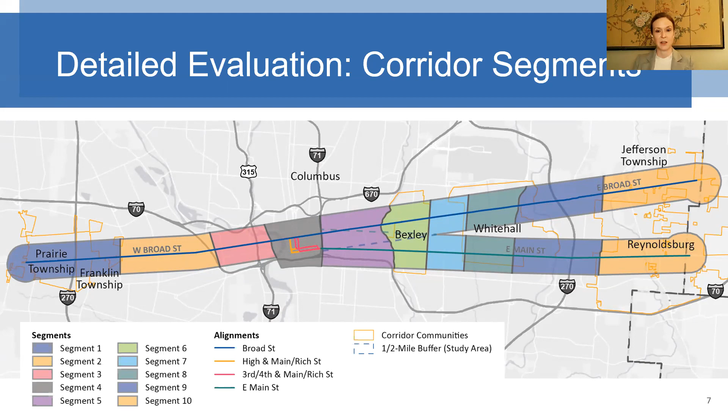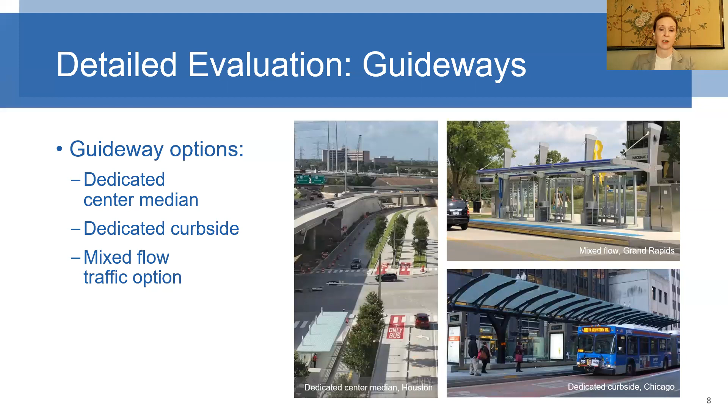The detailed evaluation we've organized into 6 different buckets, and we've organized those results by segment. All the folks presenting today are going to present the results of these different evaluation buckets. Then we'll show you a decision-making tool where you can make different guideway decisions for each of the segments along the corridor, picking either main or broad on the east side. It'll auto-populate things like capital costs, O&M costs, ridership, and a lot of the key metrics necessary in making decisions.

What it doesn't do is capture every single consideration that we should be thinking about as we go through this process of designing the East-West Corridor BRT. We'll talk a little bit about that later as well.

Before we get started with the results, before we get into the good stuff, we want to take a step back and remember the project goals that we set up at the beginning of this process. These should anchor us as we're looking at all these results and be the lens through which we make decisions based on those results. So just a quick refresh.

The first goal has to do with greater reliability, greater frequency, shorter travel times—just improving overall transit service. The second has to do with integration within the existing and future high capacity network. We haven't been thinking about the East-West Corridor in a bubble or a silo; this is always with an eye towards network integration.

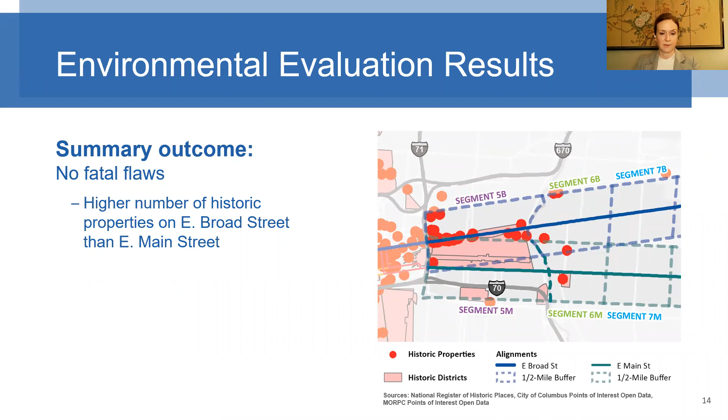All right, I'm going to pass it over to Sarah Richards to walk us through the station area analysis.

Thank you, Julia. Again, my name is Sarah Richards. I'm an associate with AECOM Economics. And for this analysis, the goals for this project, both COTA's goals, which Julia went over a little bit earlier, and also the FTA's priorities for funding were top of mind for how we structured this analysis. So for this particular approach, we were basically looking at 3 main themes or 3 main buckets of metrics.

That covered a number of socio-demographic, market, and economic factors. So we were looking at redevelopment and market potential, looking at possibly where investment's happening, where it might happen in the future. We looked at historically disadvantaged or vulnerable populations. And then we just looked at straight employment and population density. Where were the most people living per square mile and where were the most jobs?

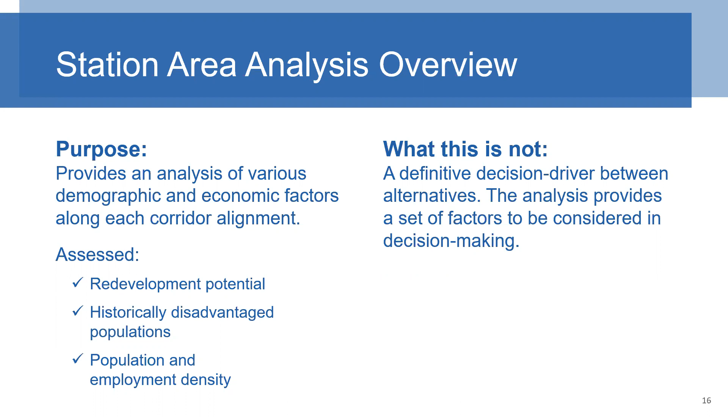Again, this is just a piece of a very large puzzle, and this was designed to help inform decision-making for this project. But again, it's not a definitive be-all and end-all in terms of deciding between alignments or station areas. So I think we can probably move to the next slide.

For this analysis, we actually ended up indexing the station areas and the East Broad and East Main alignments for a quicker, more high-level comparison between the two. The redevelopment potential analysis and the population employment density analysis didn't really show a clear difference or clear winner between the East Broad and East Main Street alignments. They were actually pretty close in terms of the densities there and what we thought the potential was for redevelopment and for continued job growth.

However, when we looked at these historically disadvantaged populations, there was a pretty clear difference between the East Broad and East Main alignments. We really saw a higher concentration of these vulnerable populations along East Main. So the main metrics we looked at, could we go back one slide, were the share of the population identifying as non-white, so minority population, the share of households below poverty, the share of households that had no access to a vehicle within the household, and then of course, where affordable housing was located. This is an important priority both for COTA and for the FTA when they're looking at projects to fund, so it was really important for us to look at this.

If we want to move to the next slide, as you can see, this set of metrics really did differentiate between East Main and East Broad, and we did see a higher concentration of these potentially vulnerable populations along East Main Street. Again, this is just one piece of the puzzle, but it's an important factor to keep in mind when comparing the alignments.

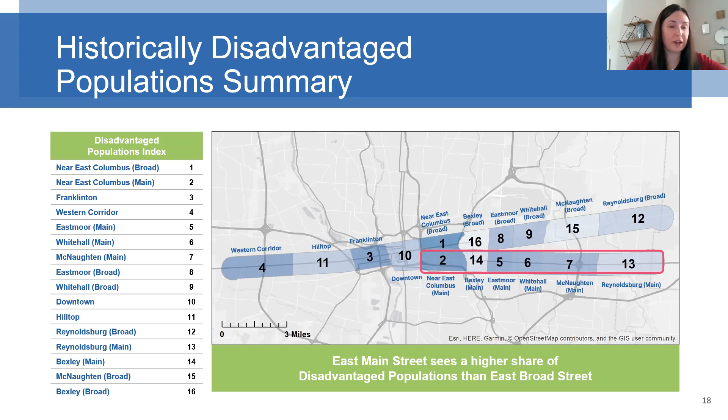Well, then we will trudge onward and get to one of the most fun parts, right? Transportation.

All right, thanks, Mindy. I will just introduce what we looked at for the transportation evaluation, and a few of us will be presenting these results. The purpose of this was really to get a high-level look at the potential transportation impacts and some of the key areas along the corridor. So we looked at transportation as a broad umbrella, specifically active transportation, so bike and ped access, on-street parking implications, safety, and traffic. Just to set your expectations, this is not yet a detailed traffic study for every intersection on the corridor. At this point, for the purpose of evaluating those alternatives and ultimately choosing a preferred alternative, we looked at key areas along both alignments just to get a sense for the potential impacts.

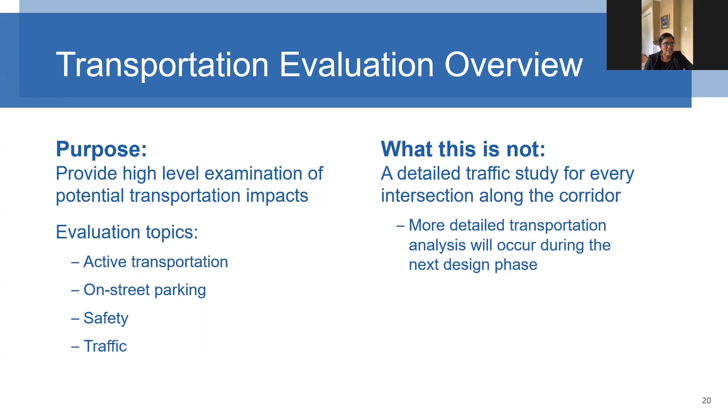So first up, Sally's going to talk through the active transportation analysis. Great, thanks, Preeti. So my name is Sally Sharrow. I'm a planner with Toole Design here in Columbus, and I'm just going to quickly walk us through the walkshed and bikeshed analyses that we did for the proposed station areas.

So I'll start with the walksheds. Most people are going to be willing to walk about 10 minutes to get to a high capacity transit stop, which is on average maybe around a half-mile walk, depending on your walking speed. And so we could just draw a half-mile circle around each of the stations and say everybody in there can walk to this station, but that's not really a very realistic measure of access to the stations.

The walkshed instead looks at the actual presence of sidewalks and crossings and roadways that can be walked on to see which of the parcels within that half-mile buffer actually have a continuous and connected walking network to get to the station. So we identified that walking network throughout the study area and then identified which parcels within those buffer areas had walking access along the network to the stations. This doesn't take into account the actual comfort or current conditions of the sidewalks, just based on the current sidewalk inventory that we have. So it might be that they have a walking network, it might not be the most comfortable, but there's a walking network present.

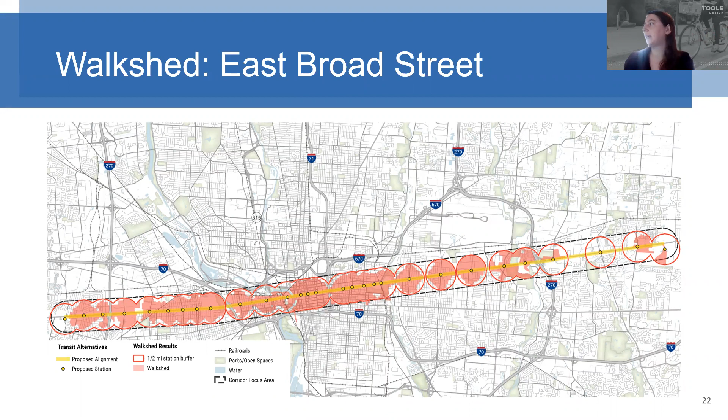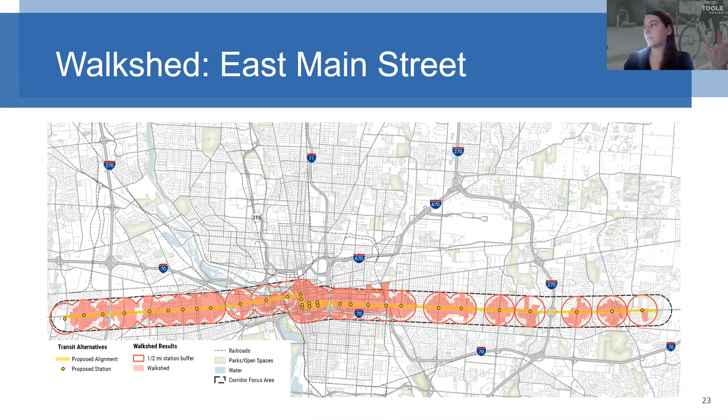On the next slide, we did this walkshed analysis for each of the two alignments, Broad Street and Main Street. You can see better coverage in the middle section, and then at the end you get into much more suburban areas, more disconnected street networks, fewer sidewalks, and some of those stations would have very limited access by walking. The Main Street alignment shows a similar pattern, where you start to lose some of that walking access under current conditions as you get to either end.

The next slide is the bike shed analysis. It's a similar concept, thinking in terms of a 10-minute bike ride, which is around one and two-thirds miles for an average adult. The bike shed analysis has two elements. There's what we call the potential light bike shed, shown in light purple, which considers any road currently available for use by bicyclists—any road but a highway. We consider what the routing would be to the stations along those roadways.

Then the dark purple is our low stress bike shed. MORPC has a data set that shows the level of comfort for cyclists on roadways in the region, rating things from good to poor access. This is thinking about the level of stress for people who might not be super comfortable bicycling but want to use a bike to get to a station. We basically removed all of the high stress roadways—your wide roadways, your high speed roadways—to see what the routing is for people to get to a station on just a lower stress roadway.

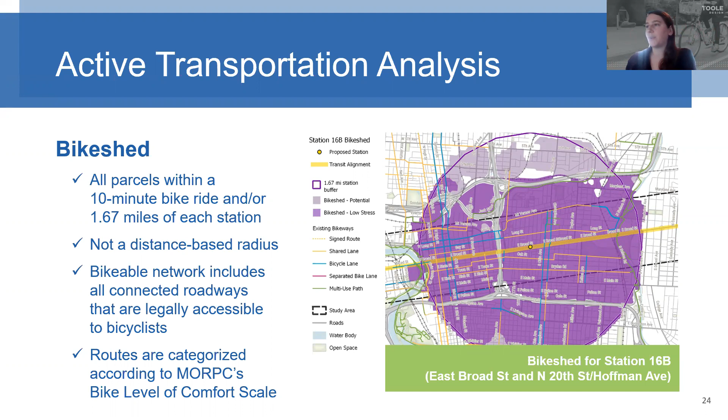Again, this is using some existing data. It might not capture all of the considerations a cyclist might take, and it could mean they get there within that one and two-thirds miles, but via a super roundabout and not very convenient route. But in the same example of East Broad and North 20th, we're in a more dense street network with lots of connectivity, and most of that area people could bike on a low stress bike shed.

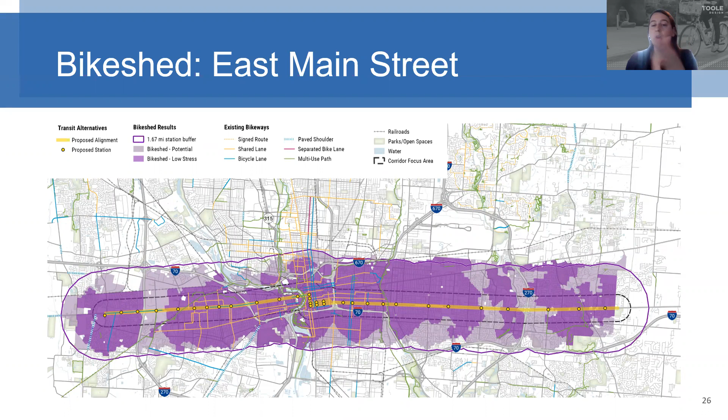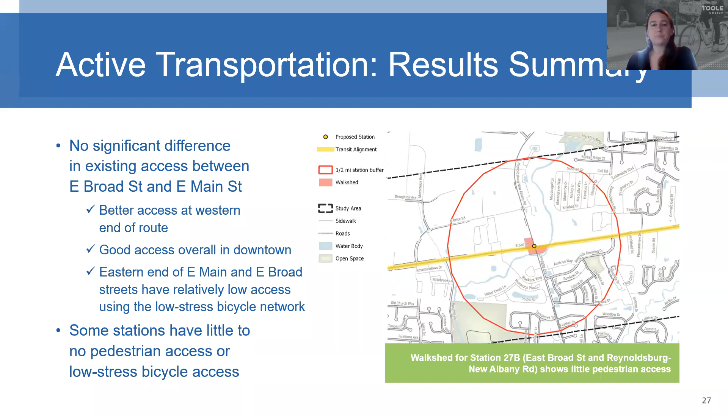So our summary of these results: there's not a huge difference when looking at these walk sheds and bike sheds comparing the two routes to each other. What we are seeing is some differentiation in the areas of the city that have better access than others. In the long run, this is going to help us understand where strategic investments could be made to expand access to those stations. Some stations have no access at all, and those are key ones to look at. Also, even if our current analysis shows access, that doesn't mean there aren't improvements that could be made to make that a better experience—more facilities, wayfinding, wider sidewalks, things like that. That summarizes everything, and I'll pass it off for the on-street parking analysis.

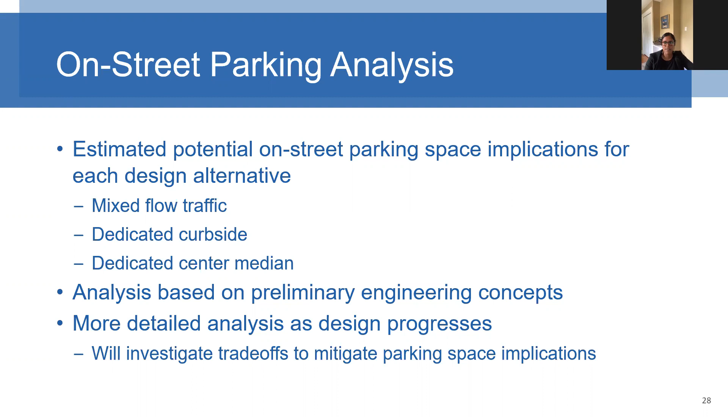So in considering the three alternatives, we have our mixed flow, dedicated curbside, and dedicated median. I think we've already mentioned that mixed flow has the least parking implications, not surprising, since it really is sort of an existing condition of the streetscape.

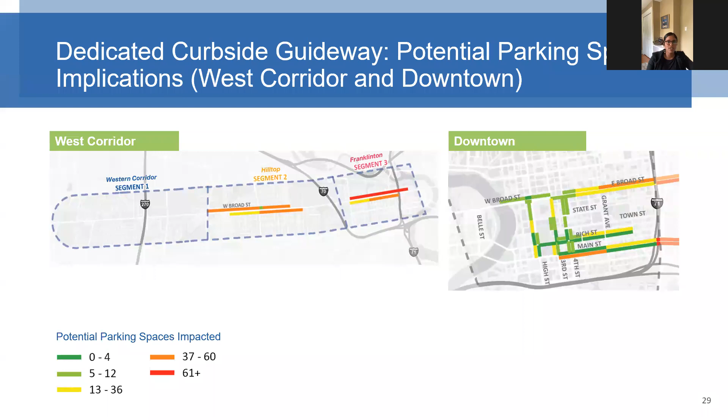So there's no on-peak time parking allowed at this point, and we haven't yet looked at utilization. So that's another thing that will come as we go further in the process.

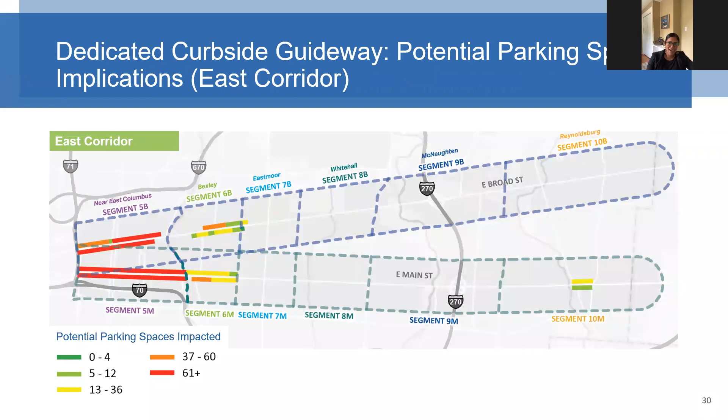Again, looking at this dedicated curbside guideway, you can see there are some more potential impacts in the Near East area, as well as Bexley. But we don't have a ton of parking available on the Far East side, so coincidentally, we're not actually impacting it.

So this kind of is summarizing the analysis here. And as I mentioned, dedicated curbside has the most potential impacts on parking spaces.

And the other takeaway that we found is that the East Main alignment sees potentially higher impacts on parking than the East Broad, based on this early analysis. So that's just to kind of keep in the back of your mind.

Again, it's the start of a conversation. So these results are, we can move the needle on this as we move forward with the design.

And I'm going to shift over to traffic, who will be presenting. Christy will be presenting. Hi, my name is Christy Norfolk, I'm with Lanham Engineering.

To do the initial, very high level traffic analysis, we looked at crashes along both corridors and traffic volumes along both corridors.

And we picked six intersections that would be most likely impacted by any changes to the cross-section.

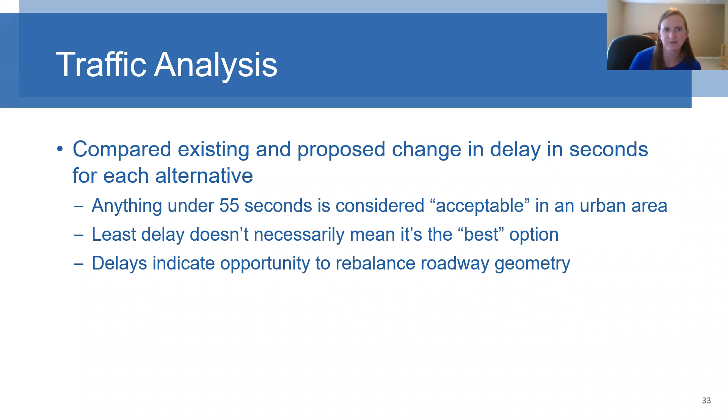So what we found when we looked at those six intersections was the greatest delays occurred when we dropped the street cross-section down to one through lane for general traffic. At Hamilton and Main, this increased delay by about 17 seconds.

At Reynoldsburg, New Albany, and Broad Street, it increased it by about 100 seconds. But that's at the intersection overall, not any specific approach. It's not like if you're making a left-hand turn, you're suddenly waiting over a minute. It's spread out throughout all the movements.

If we added another through lane, obviously the capacity gets better. So if we can fit in two general purpose through lanes and a bus lane, we're going to have better capacity.

The intersection that we saw the biggest changes in was at High and Broad Street, in the analysis that we did, where we were looking at buses turning from...

...Broad Street onto High Street and vice versa to get to the Main Street option.

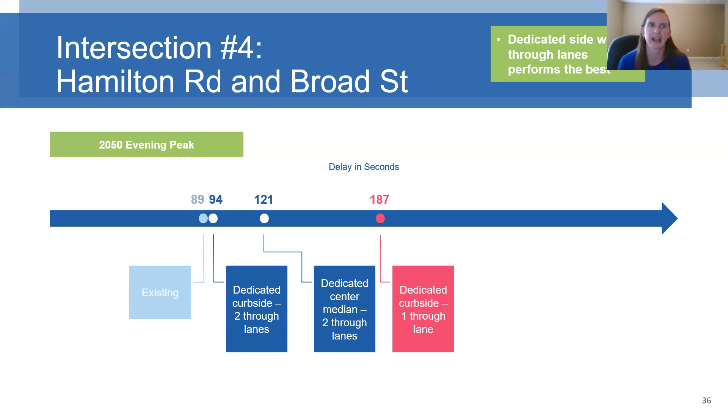So what we saw was that the Broad Street alignment performs a little bit better, mainly due to the turning movements at High and Broad Streets. Adding that extra signal phase increases delay. There's a little bit of a difference between the dedicated curbside with 2 through lanes and the dedicated center median with 2 through lanes, but it's not a huge difference.

We also looked at safety, both at the intersections and in the corridor if we added a transit lane. All of these intersections had high crash rates—everything except High and Broad appeared on MORPC's high crash intersections list or ODOT's Highway Safety Improvement Program list. These were intersections already having issues. For a generic segment along Broad Street and Main Street, adding a transit lane, whether curbside or center median, is expected to reduce crashes by about half a crash per year. The dedicated curbside performs marginally better at the intersections, but both performed fairly similar, and with mixed flow there was no significant change in safety.

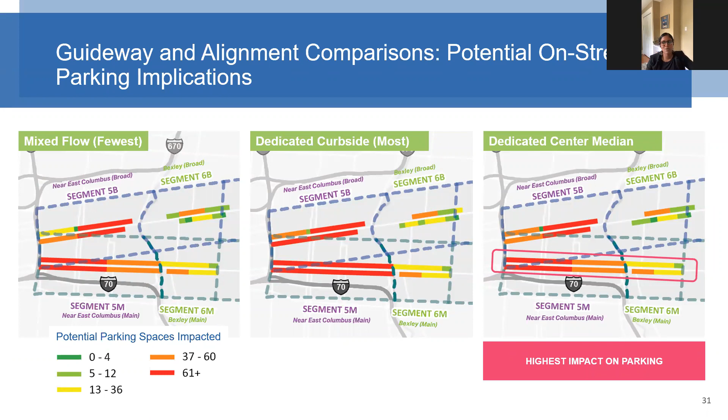Yes, this is based on our early engineering drawings that are currently in the works. So it's looking at the different cross sections with each of the alignment or guideway types. For dedicated curbside, in most cases our goal was to try to preserve the parking lane at this point. At stations, there would be an impact, and that's what you see reflected in the mixed flow. The mixed flow impacts occur at stations, where we'd have to get rid of parking for at least a stretch of about five parking spaces. For dedicated curbside, you see impacts because there's more interaction with the curb lane and turning, so we balanced that at intersections and in between for both alignments—that's why the median isn't that bad, it's in the middle. We have some impact on the cross section because we're making space for the transit lane, but we tried to preserve as much as possible for this first cut.

And then Tony, I see you have your hand raised.

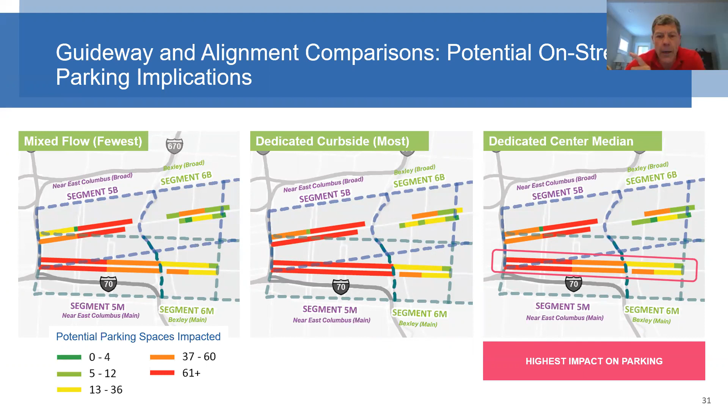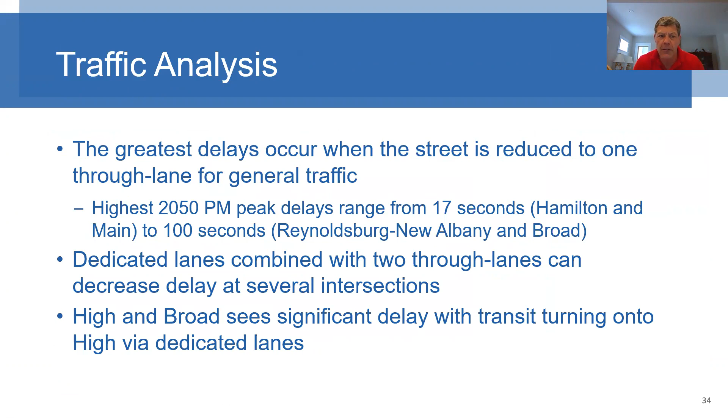Going back to the intersection delays by seconds—aren't your larger intersections with more volume and more lanes going to have higher delay, since the second delay was based on all lanes for the entire intersection? So how do you level that, if you will? Obviously Broad and High is going to have a higher delay because there's a higher volume of traffic and more lanes than other intersections. Am I asking the question correctly? Do you understand my concern? The intersections we picked all had a lot of volume going through them as it is—we're looking at Hague and Broad, James and Broad. There's already a lot of traffic on both the main road and any of the crossroads.

When we looked at the proposed, we looked at, okay, if we're only going to have one through lane, this is how much it's going to impact compared to what it is now. And then we also looked at, okay, if we put in two general purpose through lanes, how is it going to impact? We tried to compare apples to apples as much as we could.

The High Street intersection is kind of its own little beast because we were looking more at how the different alignments are going to impact traffic at that point. So we looked at assuming we're going to maintain 3 lanes along High Street. Turning traffic is pretty much negligible at that intersection during any of the peak hours. It's already prohibited. So it actually doesn't perform nearly as badly as some of these other intersections because of that. You eliminate a lot of that delay.

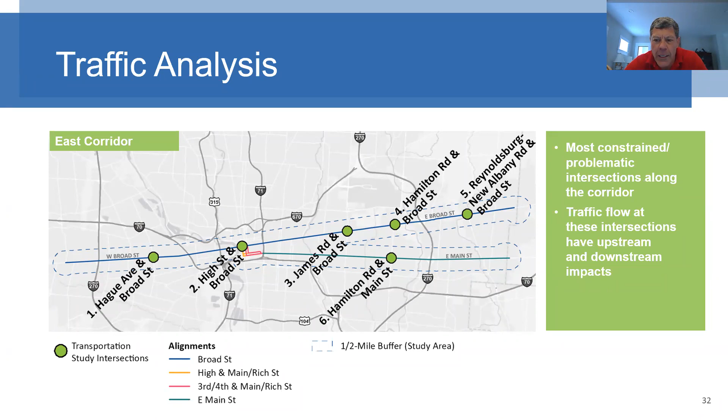Okay, thank you. I have one additional question, back to the walk shed. Sorry to backtrack here. I know you looked at sidewalk volume, were ADA routes also looked at and considered?

So this basically just uses the existing sidewalk data inventory for the city that exists. So basically that says, is there a sidewalk or not? Is there a crossing or not? So no, it does not take into account the actual ADA concerns or conditions that are problematic there. Okay, I just wanted to bring up the thought. So thank you.

So Sally, does that come in a future phase, or does that ever get brought in as a factor? We know that you're aware of it and that there's a multitude of factors, but how does that ever get surfaced later, or is that something that just we know as more qualitative?

I would think that that's a little more qualitative. I'm not aware of a citywide data set that says where there's ADA issues, and because of the size of this corridor, it would be hard to analyze that as a whole. In future phases, I assume we're going to be doing a closer analysis when we pick which alternative we're going with. That will get a little bit more into what the considerations would be, and what things such as pedestrian comfort, ADA, things like that need to be incorporated into any projects to improve access.

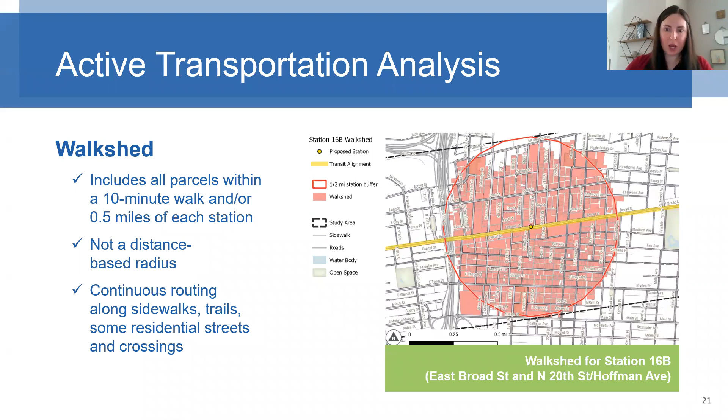All right, I'm not seeing any additional questions. Anybody else on this traffic and on-street topic? Okay, then we will move right on to ridership forecast.

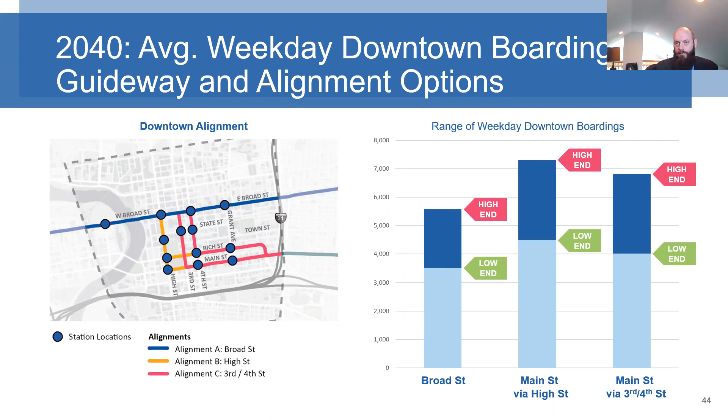Emily, does that provide the clarity that's helpful for you?

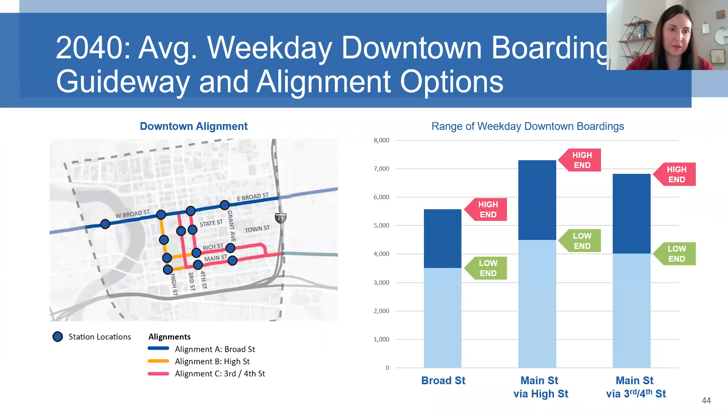Next slide. As we're going over capital costs, I want people to realize that we're at about 3 to 5% design at this point, and we have capital costs based on those concepts that we've discussed and been presenting. These costs will continue to be refined as the level of design goes up. What we have now are for comparative level and some high level decision making. We have appropriate contingencies baked in based on FTA's recommendations for levels of contingency at this level of design. That's how we're trying to move forward, allowing for some future decision making, but still making sure we're matching things to the level of design that we have now.

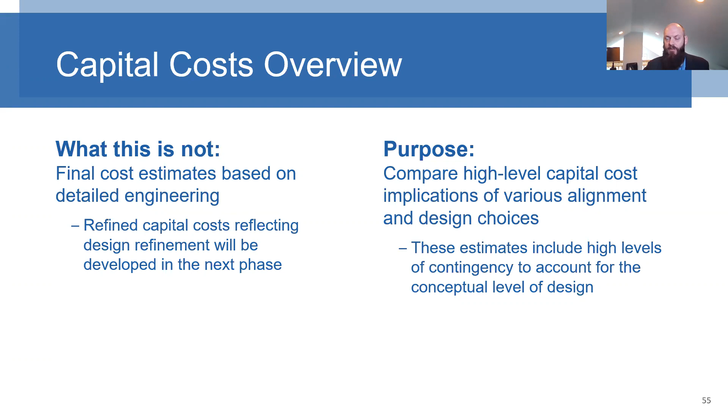Next slide. One of the things you'll see is that our capital costs are organized by the standard cost categories for capital projects. This is something FTA requires when doing these projects, but it's also very useful for comparing costs between the project at this point in design and what it will be as design moves forward, because we'll continually be putting costs into those same buckets. It'll also allow, as COTA is advancing other projects through the LinkUS initiative, those costs to be organized in the same manner.

It also allows you to easily pick up and compare to a project in Cleveland, Chicago, Minneapolis, or Miami as you go around the country to figure out if this is a reasonable comparable project. So that's something we try to deliver - a good assessment and a way to compare costs from one project to another, to make sure things are matching up, rather than just giving big numbers without people getting a sense of what those are for different alternatives.